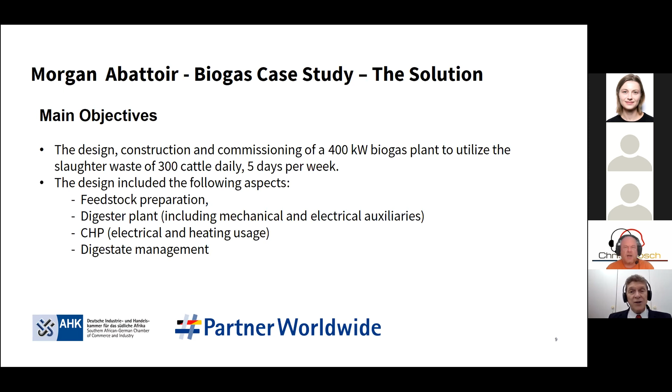The design, from the initial planning stage, had to accommodate and address feedstock preparation. It included a digester plant with all the mechanical and electrical auxiliaries necessary to operate it successfully, and a cogeneration plant providing electricity generation as well as thermal and heating opportunities for local and external needs. It also had to develop a manner in which digestate could be managed effectively. That was part of the brief for designing this plant.

Some key elements in this plant design included a standard continuous stirred tank reactor with externally mounted gas mixing equipment and heating through external heat exchangers, which significantly reduced the complexity and cost of maintenance because those components were mounted externally.

As required, a pasteurizer was included to comply with legislation that required all hazardous material to be pasteurized for an hour at 70 degrees Celsius. A mixing tank was also included where all the different waste streams from the abattoir would first be collected and mixed to ensure a homogeneous slurry into the digester.

In addition to the mixing tank, a second tank was commissioned to store the daily production of digestate for a maximum of 5 days before it was removed from site by tanker truck and transported to agricultural land for disposal. Interestingly, that second tank had a gas dome so that the last little bit of gas produced in the process could be captured before transportation and disposal.

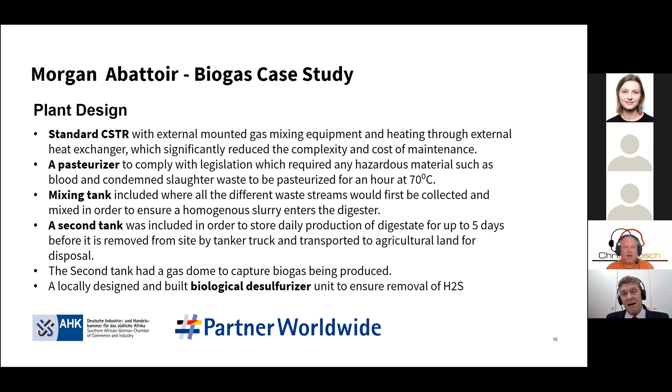Equally interesting was the commissioning, development, and installation of a locally developed desulfurizing unit to ensure the removal of hydrogen sulfide.

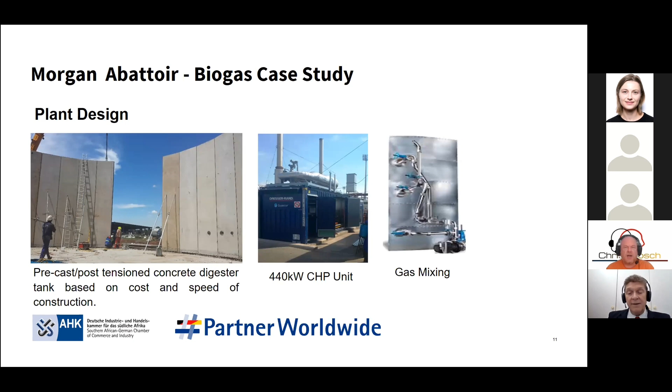To show some images: here, based purely on cost and speed of construction, the digester was a precast, post-tension concrete digester. That was the cogeneration plant that had been developed, and this shows the gas mixing and external heat exchangers - the external auxiliaries that enabled relatively easy maintenance to the digester.

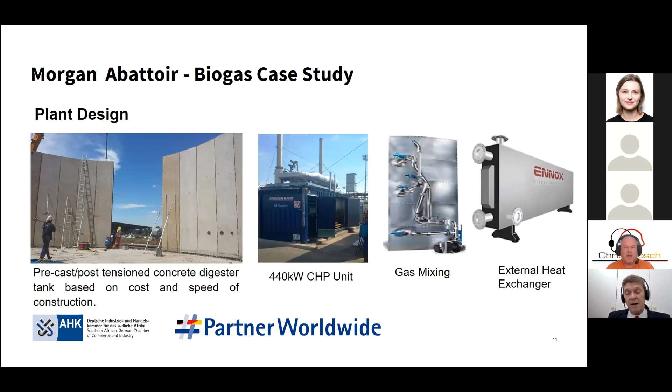Some outcomes and lessons learned: about 8% of the electricity generated was consumed for heating the anaerobic digester, and the biogas plant supplied 50% of the electricity requirements of the abattoir.

Waste heat water heating replaced the coal-fired boiler that had, up until that point, been used to provide hot water to the plant. This also provided a waste management solution in terms of disposal of hazardous waste to landfill, and provided an IRR of 20.5% with a 7-year payback.

Some lessons learned: the cost-plus contract applied in this particular instance contributed to time and cost overruns at the end of the day, and with hindsight, an EPC contract would have been preferred.

Also important in terms of lessons learned was the realization of the importance of appointing developers and contractors who have deep and extensive experience in biogas and in the erection, installation, and commissioning of biogas plants, in order to limit the risk.

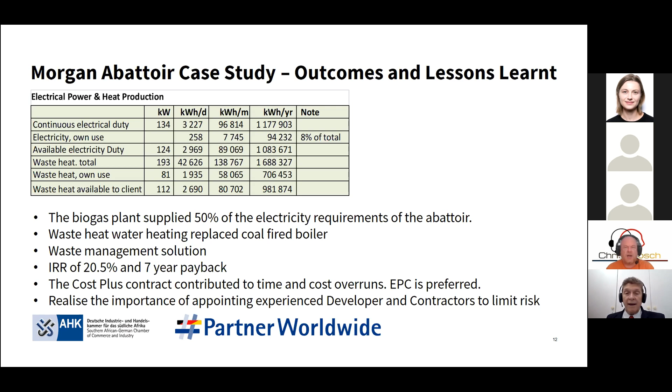I'm going to move on now to the next case study, Woodlands Dairy. For those who don't know about Woodlands Dairy, it's a pretty large dairy, probably one of the largest in South Africa. It's based in the Eastern Cape, in Humansdorp in particular, employs more than 1,000 people, and is one of the largest manufacturers of UHT milk in South Africa, marketed under the brand First Choice.

They are a processor of farm fresh milk who produce and package high quality dairy products. Dairy farming methods should not only have a minimum impact on the environment - that was certainly the view Woodlands Dairy took - but should also be an animal friendly process and operation, boosting public support for dairy farming at large through community support.

In terms of the challenges faced, looking at the effluent specifications: there was a feed rate of 1,500 cubic meters per day at a pH level of 12, a total chemical oxygen demand of 10 grams per liter, and a COD load of 15 tons per day.

Woodlands contracted Veolia Water Technologies to provide a viable processing solution for the growing process effluent stream. They were starting to ramp up production and were seeing this growing stream being discharged to drain at that point. The facility contains a milk sterilization and packaging plant, as well as a cheese factory.

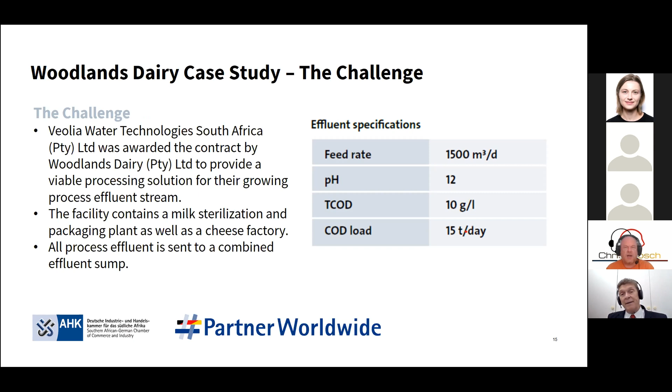All the process effluent is sent to a combined effluent sump. There was a need to look at another way to deal with that in light of the anticipated growth within the plant, and in terms of what was happening globally in dairies, as global demand for milk, cheese, yogurt, and other dairy products continues to grow, cost and energy management concerns are driving the introduction of new technologies in dairies to optimize and control the cost of water usage. So we start to see that energy-water nexus revealing its hand again.

Of the forces shaping the modernization of the dairy industry, water usage, energy cost, and recovery of lost products are the key drivers to change. It's within the context of that understanding, and what was happening globally, that there was an objective to keep the cow water. What is meant by that: they were looking at the recovery of condensate from evaporation of dairy products, or as they termed it, cow water, for reuse—becoming a growing market with the potential for a rapid return on investment.

The benefits of condensate recovery using reverse osmosis systems can be twofold: savings in water consumption and its very high level of water purity in many cases, as well as waste heat recovery potential.

In terms of the achievements and results that occurred and the actions taken, some key figures to share: a high COD loading of about 15 tons COD per day, growing effluent demand and anticipated growth in the dairy operation, the existence of long chain organics in the effluent, and the need to achieve a plant effluent concentration within and well below the local municipal standards, along with the objective of recovering more than 95% of that.

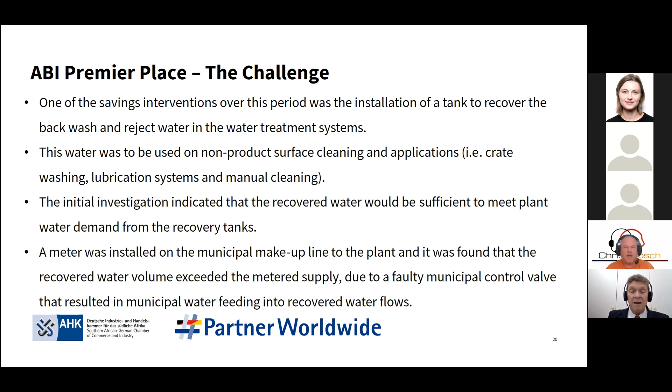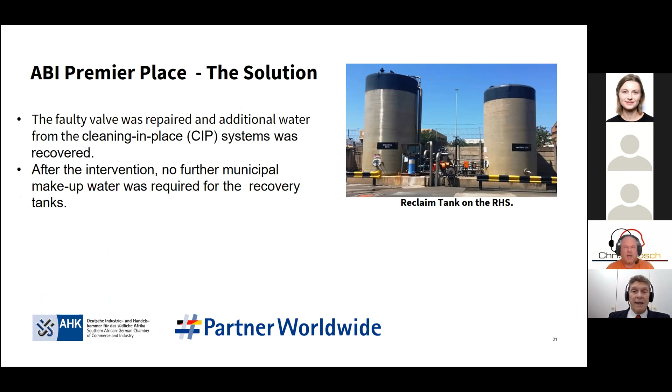We look at the solution that was ultimately implemented at ABI. The faulty valve was repaired and additional water from the cleaning in place systems was also recovered. After the intervention, no further municipal makeup water was required for the recovery tanks at all. So all cleaning and washing of crates, lubrication, and other non-product contact cleaning was now done with recycled water.

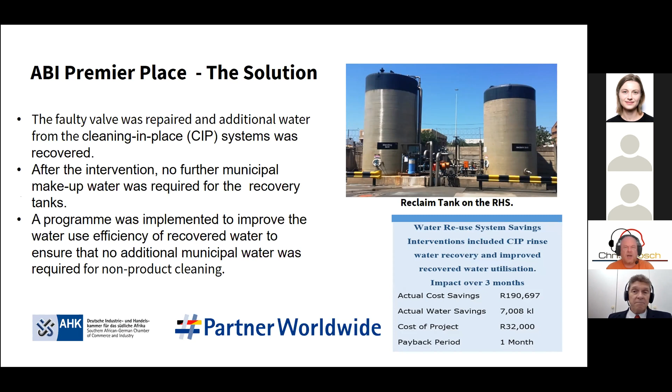A program was implemented to improve water use efficiency of recovered water to ensure that no additional municipal water was required for non-product cleaning. The numbers that resulted from this intervention show that over the first 3 months following implementation, there was an actual metered savings of water of 7,000 kiloliters, based at the same production and output levels. So what are some of the lessons learned?

Initially, all of the rinse water was recovered, resulting in contamination of the reclaimed tank. That was subsequently altered in order to reject the first 15% of rinse water. And I imagine with a later upgrade of that technology, a very strategically located strainer or filter unit can address that and even capture that 15% being discharged.

An ongoing leak management program was implemented to ensure that losses are more effectively tracked, tagged, managed, and controlled. The fact that it's continuous is an indication that you cannot take your eye off the ball. Leaks occur and continue to spring everywhere, so keeping watch not only in terms of water, but in terms of steam in some steam systems as well.

In terms of next steps, ABI recycled the backwash water from the water treatment and bottle washer softening plants and saved 8% of that consumption. They installed a lubricant recovery system to reduce lubricant usage and COD concentration levels in the effluent, and repaired the effluent pH correction system.

And quite often, if I go back to that first bullet point on next steps, we see that through a cycle of washes, the final washes are relatively clean and discharged. What they are doing, which we have done quite successfully in many other organizations, is taking the final rinse water and recycling that as the first rinse water in the next cycle, reducing water consumption too.

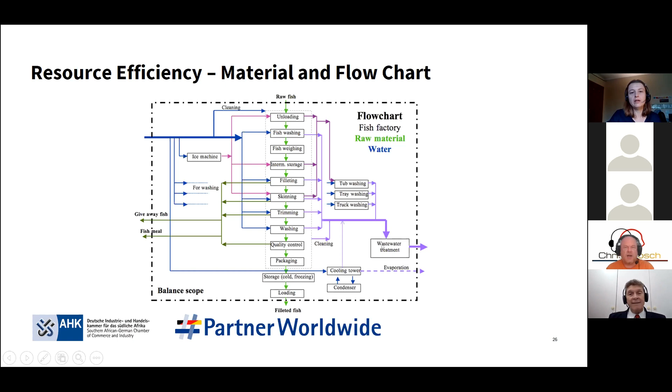Developing this material and flow chart in many cases can be quite eye-opening and highly informative. The purpose of that, at the end of the day, is very similar to what happens in the planning stage of the plan-do-check methodology: to develop and prioritize action plans.

In that way we prioritize what needs to be done now, what needs to be addressed first, and guide a deeper, more detailed assessment into that particular area. That's how we're guided, and these focus areas are normally discussed with and agreed with plant management.

Implementation of resource efficiency measures: I think we appreciate that water security is complex. It requires money—money that in many cases may be diverted from investments in other revenue drivers. It requires expertise, which in many companies is not a core competence.

I go into many companies and ask for the energy manager, and typically an electrical engineer will come and present himself to me. But if I go into an organization and ask to meet the water champion, the water manager, there's hardly anybody who can put their hand up and address that need. That, in many ways, leads to and is a cause of the lack of focus we see in terms of water use efficiency.

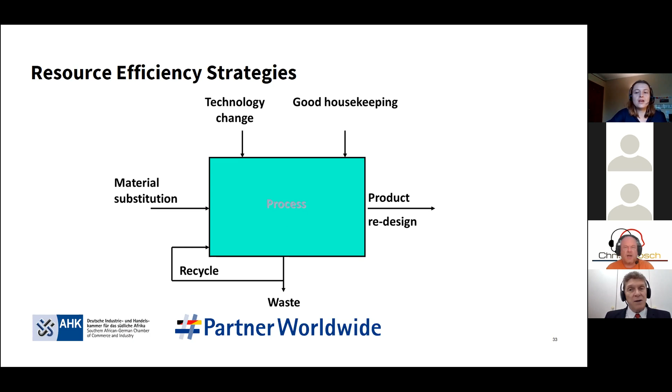So implementing resource efficiency measures - this is my last slide, capping this off, and this goes beyond the mandate of the project. But it's important to look beyond the barriers of the project, beyond the resource efficiency assessment, because there will be a need to implement some of those recommendations. There would be compelling opportunities in terms of compliance, cost savings, and other benefits that may force the company's hand to implement, in which case we will need leadership commitment. This is no longer a middle management focus - it becomes an all-encompassing focus with the inclusion of leadership and top management.

And where will we start? We will start with the no-cost measures. We want to prove and demonstrate the value of resource efficiency by showing how we can save water and materials without spending any money. Once we have exhausted those, we will look at the low-cost measures - the kind that can be covered by OPEX and maintenance budgets, things like leak maintenance, general maintenance that can improve reliability of plant and equipment. We want to look at whether the maintenance budget can cover some of the metering we need within the plant.

We will then look at behavior change. Behavior change I term the silent salesman, because it's through behavior change that the significant people in the business - the operators operating a multi-million rand machine and controlling the use of huge volumes of water and raw material - come to understand the implications of their actions, not only in terms of operational efficiencies, but water use efficiency and raw material efficiency, and adapt that into the way they operate and manage and discharge their duties.